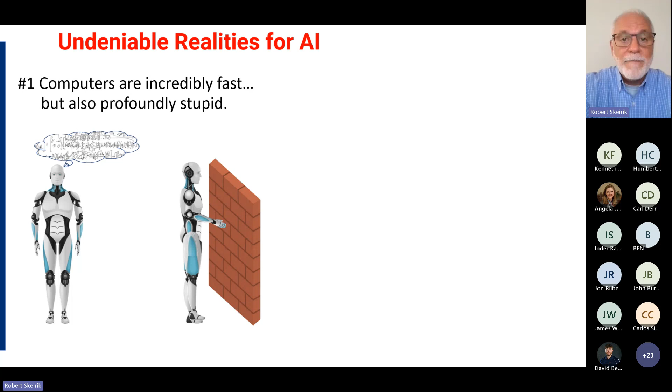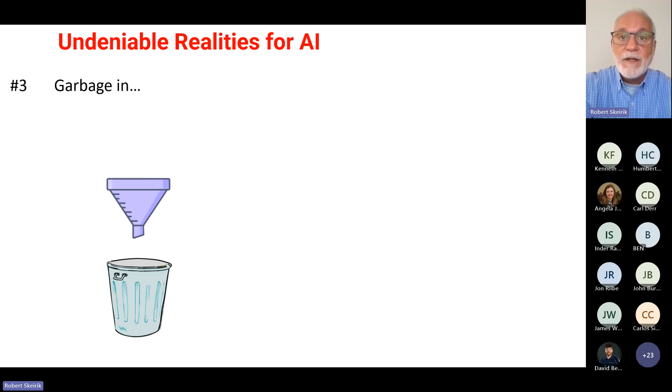So with that, let's get back to the topic of today, which is proper care and feeding of your vibration AI. And we'll start with the undeniable realities of AI. The number one reality is that while computers are incredibly fast, they are also profoundly stupid. They will continue to do whatever task you ask them to do, whether it works or does not. Second is that artificial processes only work if they mimic what humans can do. Number 3 is the old adage, garbage in, you get garbage out. And number 4, you cannot predict what you cannot see.

So, going back to our topic, what do you feed your vibration AI? The key questions are, how do I avoid garbage in? And secondly, how do I ensure that I'm seeing the data that I need to be able to analyze and predict the condition of the machine and when it may fail? The answer to that is measuring vibration in 3D. And no, I do not mean horizontal, vertical, and axial. It's a different 3 dimensions.

The first one is the frequency range. How high frequency is high enough? And if I'm not measuring into the high range, what am I missing? The second dimension is amplitude. And the question is, how much is enough? And what else will tell me when to intervene if I'm not tracking the amplitude of the vibration defect signals?

And the third one, which is largely overlooked, is the sampling rate. The question is how fast is fast enough? And if I'm not sampling fast enough, what events am I missing? So if we had a device with a limited frequency and amplitude range, and also with a lower sampling rate, which would fit with the lower frequency range, I would consider that inadequate for machine monitoring.

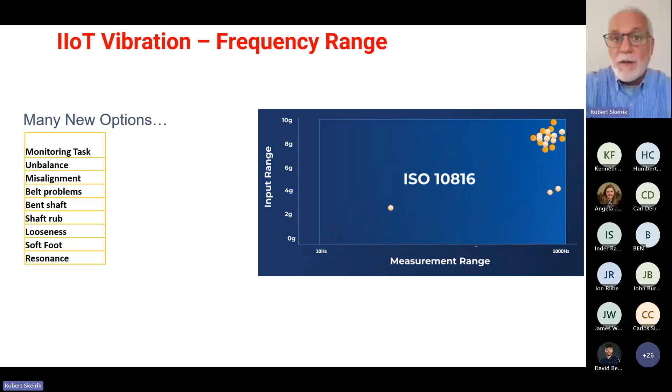And what they will tell you reliably is they will tell you about unbalance, misalignment. They'll pick up belt issues, bent shafts, shaft rubs, also mechanical looseness, soft foot, and resonances. So basically it's telling you about the shaft, the coupling, the structure, and the foundation. However, it's missing the 2 key production killers, which I would say, based on 3.5 decades of experience in this market space, rolling element bearing defects and gear defects are the 2 main things that shut down your facility.

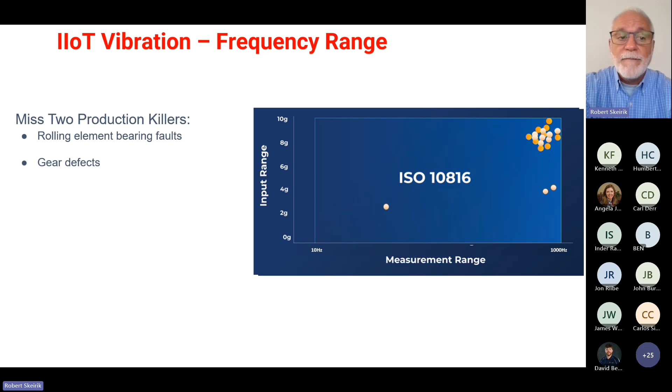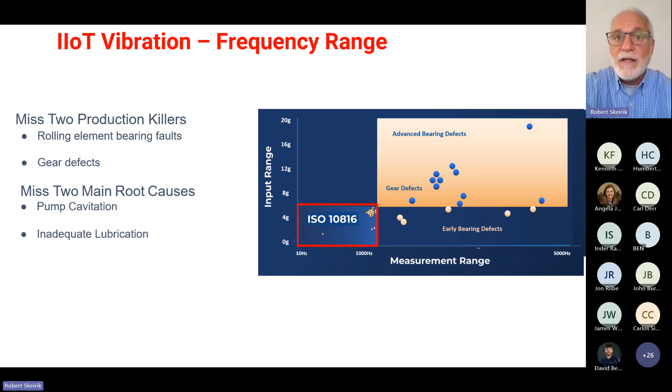So the ISO range, we're going to park it down here in this little red box, and now we're going to extend out to 5 kilohertz, 5,000 hertz, and now we can start to reliably pick up the bearing defects and the gear defects. However, even this 5 kilohertz range is missing the 2 primary root causes of our main killers, and that's cavitation on pumps and inadequate lubrication.

So we're going to take this expanded range and we're going to park it again down in that little red box. And now instead of capping it at 5 kilohertz, we're going to go out to 20 kilohertz, and also extend the input range from 10 or 20 Gs up to 50 Gs. This is where we're going to get the best indication for sure of inadequate lubrication and pump cavitation. And there are a few choices out here that actually extend into this range. I would recommend that you focus on those solutions.

If you're not measuring out to the full frequency range, you're missing the what in the equation. The nature of the defect on the machine shows up with this expanded frequency range. If you don't have the expanded input range, what you're missing is the when. You're missing the indication of severity that tells you when you need to intervene. And unfortunately, 95% of the solutions offered in the market today live inside that red box.

And yet, based on over 10 years of study by the largest independent vibration service company, 1 out of every 3 industrial failures has key defect signals that show up in that yellow rectangle. So if you don't have full coverage of this entire field, then you either will miss an impending failure, or you may know it exists but misinterpret when it will occur.

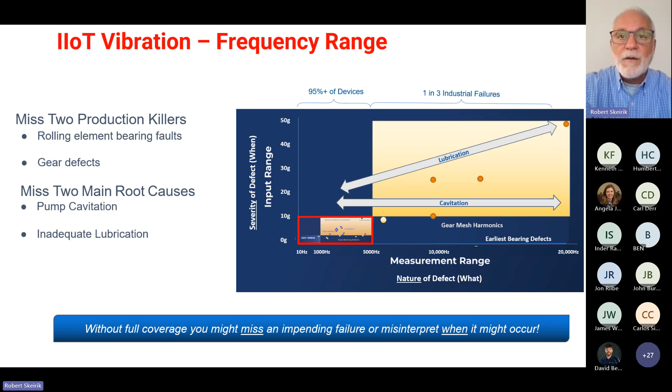If you don't measure out into these higher frequencies, then the system may not be able to see events such as bearing and gear defects, also the root causes such as lubrication and cavitation. There are some electrical defects, rotor bar damage, that show up in these high frequency ranges as well. So the result is that defects that might otherwise have been caught could remain undetected and lead to a surprise outage, resulting in you still getting the call in the middle of the night.

So with that, let's move on to the second axis, which is amplitude. So how high do you need to measure? Well, I'm going to put up some very, very high extreme vibration levels. So 3 inches per second, that's 10 times the ISO limit.

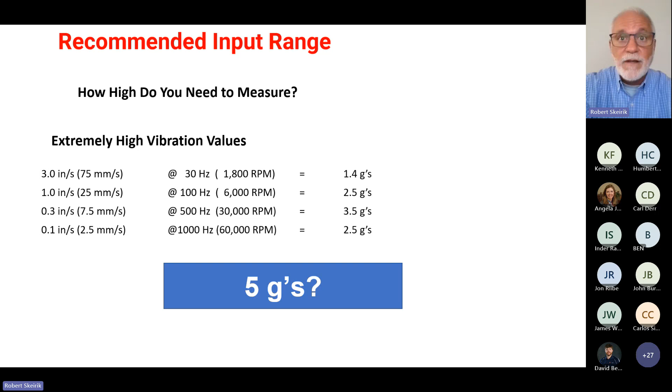There's a number of different examples there at different frequency ranges, all extremely severe levels of vibration. And yet all of these, when expressed in acceleration, are well below 5 Gs. So that would suggest, if you can measure to 5 Gs, that you have all the amplitude range that you need. And that is unfortunately the conclusion of some of the solution providers that don't really understand machinery analysis.

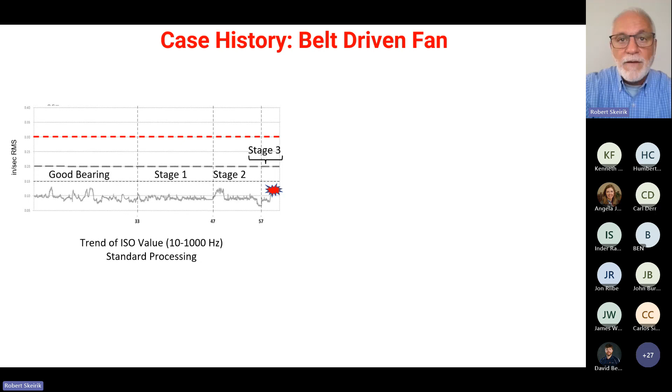So let's look at a case history. This is a garden variety belt-driven fan from an 1800 RPM motor. And what I'm going to show you on the left side of the screen over a 60-day period is the trend of the ISO vibration level. And what you see there over that 60-day period is that it never reached even the alarm level 1, let alone the ISO level, which is represented there by the red dashed line. And all of these values, all of them are well below half of a G.

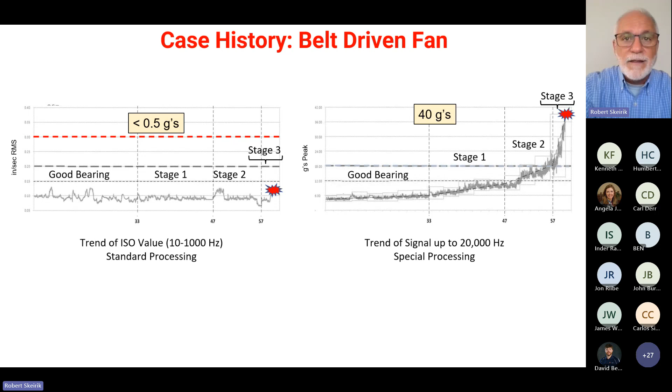So 0.5 G sounds wonderful, but the problem is that if you do special signal processing, you find that at the beginning of this 60-day period, it was already impacting on the bearing about 5 Gs. And as it moved through the failure stages of bearing defect, it increased up to and above 40 Gs. And that was simply done with the same accelerometer, but by doing more intelligent signal processing. So the data is there up to 40 Gs and beyond if you know how to look for it.

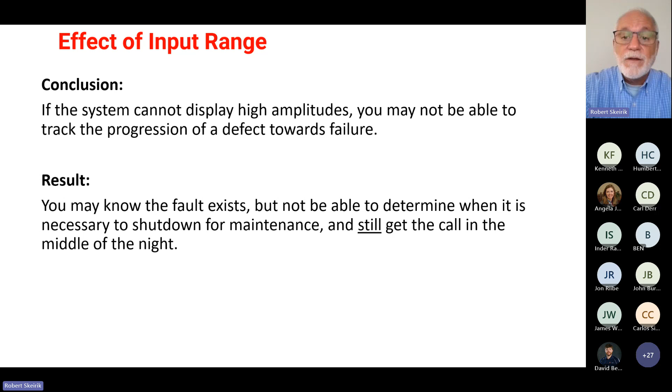So if you don't have sufficient input range, if the system can't tell you these high amplitudes, you may not be able to track the progression of a defect towards failure. So that means you may actually even know the fault exists, but not be able to determine when the shutdown is required, so you still get the call in the middle of the night. And with that, we'll move on to the least understood aspect, which is the sampling rate.

So sampling rate, why is that so important? Well, I just did some research on this at the end of last year, and pretty striking results. So what we did is we simulated a high frequency defect, so an 80 kilohertz event at 1G amplitude, and this was a triple pulse to simulate a bearing defect, inadequate lubrication. But the entire event occurs over 30 microseconds.

So this is our sample that we fed from a signal generator, so we know the amplitude is exactly plus and minus 1G. So it creates this envelope around the signal whereby, except for the impacts, what's in that red box is noise. That's the noise floor. Now we're going to look at this signal and process it with 200 kilohertz sampling rate. So that's 200,000 times per second. That allows us to have an Fmax of 80 kilohertz.

We see the entire time duration of the signal, but the amplitude has already dropped, and you'll see over here, if you can see my cursor, that the shape of those three pulses is now significantly different. That's at 200,000 times per second. Well, let's cut that in half to 100,000 times per second. And now look at the picture. The picture tells the biggest story. I still see there are three pulses, but I have lost, over here in the table, more than 3/4 of the amplitude of the original signal.

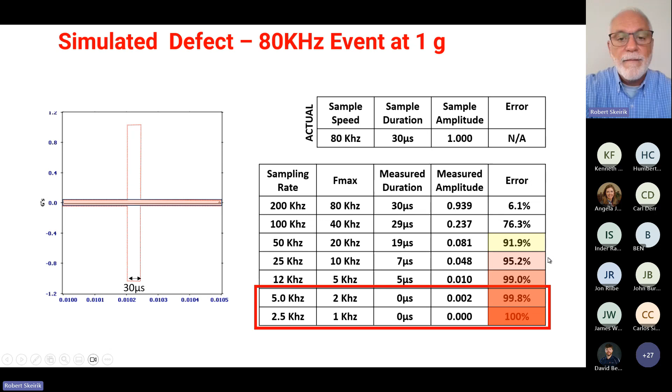So what is the recommended sampling rate? Again, regardless of the sensor type you use, good, you have to be sampling at least as fast as your fastest failure mode. Better would be at least 2 times as fast as your fastest failure mode. And the best is at least 5 times your fastest failure mode.

So what happens if you don't have sufficient sampling? Well, you will at a minimum underestimate the severity of the event or defect by a huge factor. Or worse, the machine may run to failure with no warning at all. So you may even be aware there's a developing fault, but you'll still get the call in the middle of the night.

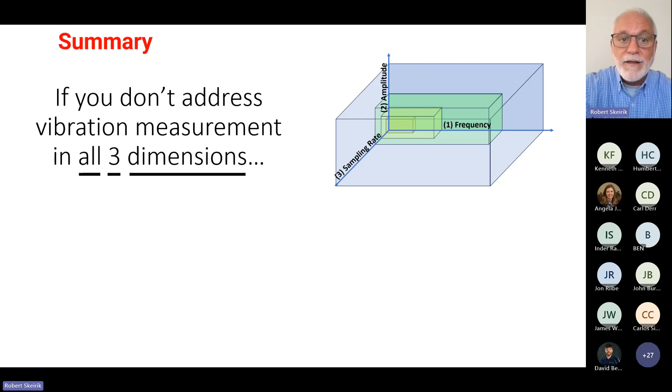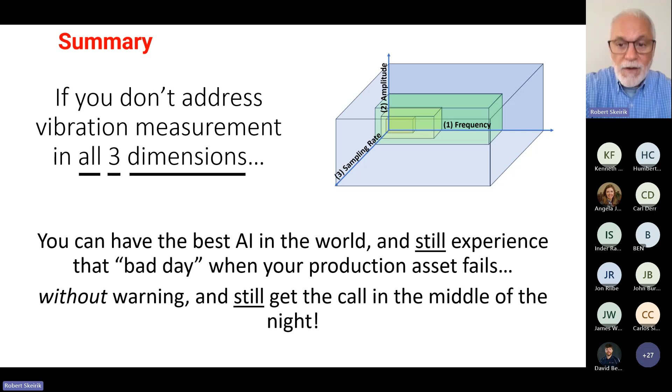So the question to ask your management is, what percentage of the developing rolling element bearing defects are they okay with you missing? And if that answer is 0, then you need to be seriously looking at all 3 of these dimensions in the vibration monitoring technology. And it doesn't really matter if it's a human or a computer. So you could have the best AI in the world and still experience the bad day when your production asset fails without warning, and you still get that call in the middle of the night.

So that's this presentation on how to feed your vibration AI. It's also how to evaluate the monitoring capability of any IIoT Industry 4.0 digitalization solution.